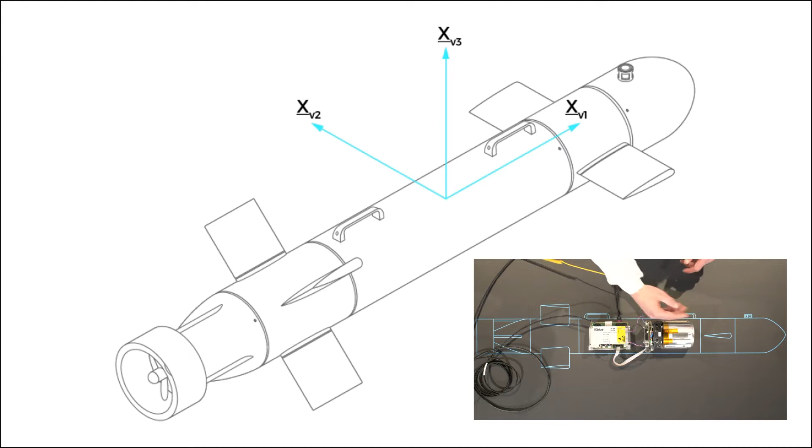So for the mechanical integration in my vehicle, I have plenty of choice of design. Here I will make it very simple and will concentrate a little bit more on the axes, conventions and orientation of the unit. This AUV here is on the side, and I will fit my INS OEM kit like this. So I will still use the same axis for X1, but you see X2 of the INS will become X3 of the vehicle.

For the electronic boards, I install them as I have room. Like I said in the previous part, I could choose to do like this or like that. Here I'll keep it simple and do like this. So now that I have properly integrated it in my vehicle, I would have to take care a little bit of heat for power dissipation. Here I have metal plates. I choose to keep them so it will dissipate through your vehicle. We'll see in the electrical part about power consumption.

So let's say this AUV body has the X1 axis along this way and the X3 axis along this way. My unit is integrated kind of on the side. X2 of the unit will become X3 of the vehicle body. Let's go back to the web interface of the unit and configure this accordingly. So in the web interface, I'll go in the mechanical parameters and I'll choose to fit the unit accordingly. So we'll see that the attaching plate side is changing direction while the board side is still on the back of the vehicle.

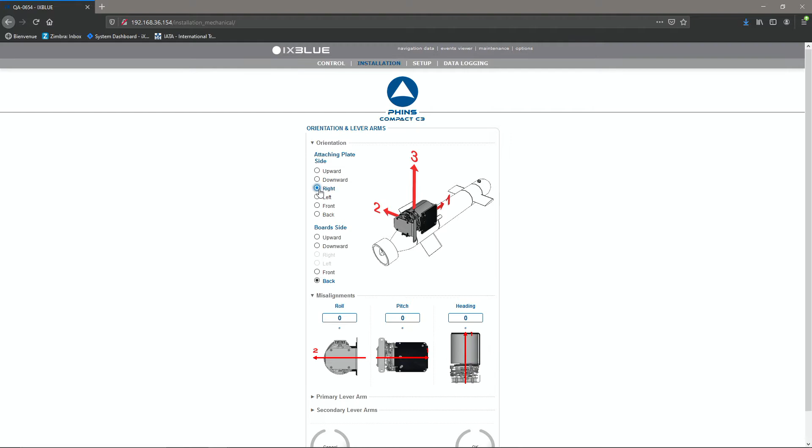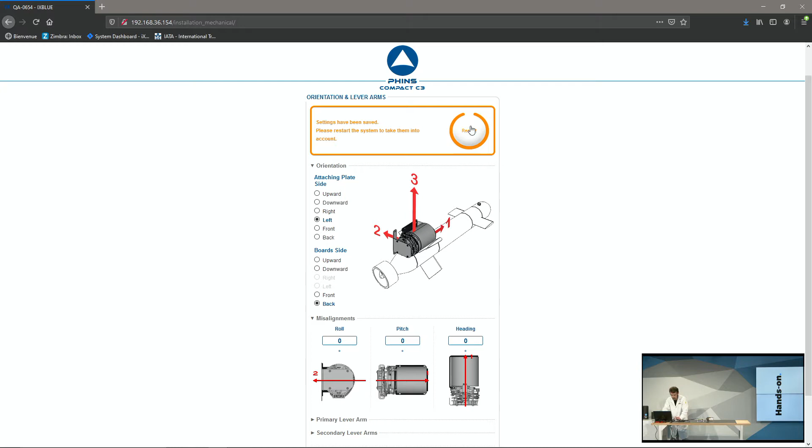Here I didn't really prepare whether it's gonna be this side or that side, so I will do it very visually. I just play with the different options to see when I have X2 of the unit becoming X3 in my user interface. So I think that's gonna be this one. You see now visually on my user interface, I have the same as I have here. The unit is on the side, on this side, and I can validate the setting in the user interface. So now the user interface prompts me to restart the unit, which I will do.

And so now, as the unit is rebooting, it was virtually like this, and now it's virtually like this in the vehicle, as I have a side view of my vehicle. So those 3 axes like this become like that with this change of configuration. It's very important for later mechanical integration because I will, for the purpose of the show, measure the offset to my USBL transponder.

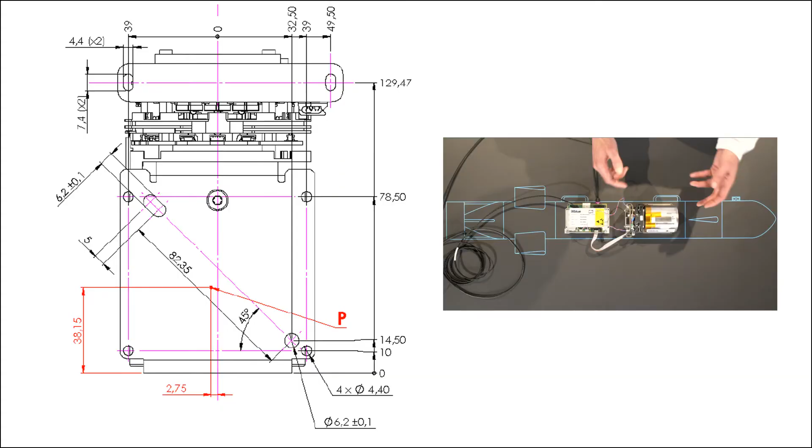To proceed with the lever arm and offsets of my USBL transponder, I will have to physically measure accurately the lever arm from here to here to here along the 3 axes of the vehicle, because now my IMU, my INS, is in the vehicle reference frame, and I will have to take a measure according to what we call at iXblue the P point, the center of measurement of the IMU subassembly. The P point is given to you through the schematic in the user documentation, and it's a little bit on the board side here and a little bit in the middle here.

So for the show purpose, I'll just use this to this and this to this for the two offsets. To measure them, I use a ruler or here a ribbon tape to measure the lever arms, to make it very visual and to implement in the user interface. So that's 23 centimeters along the X1 axis. And around the middle here, that's 6 centimeters along the X3 axis.

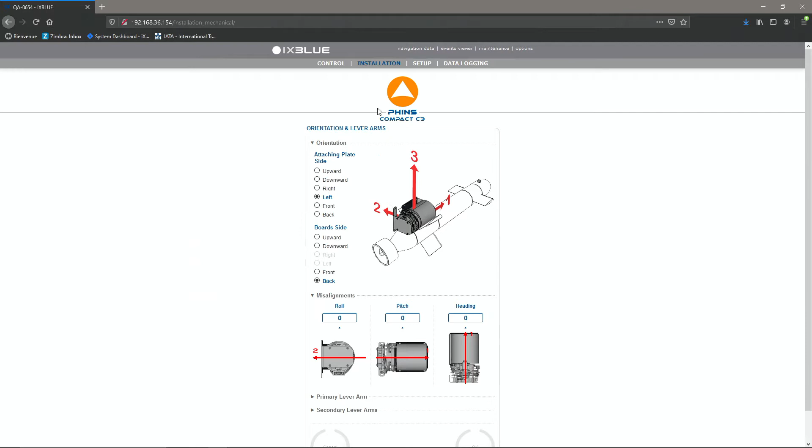So now I will set them up inside the user interface for my USBL sensor lever arm. So I go to the input menu. I choose the USBL I previously configured. And if I scroll down the configuration, I will access the lever arm. So now I can set up 23 centimeters as an offset. So you see it's 23 centimeters forward of the IMU. So it's about right, 23 centimeters forward of the IMU.

X2, let's pretend it stays at a 0 value. We choose to work in 2D to make the case study more understandable. And X3 will be 6 centimeters. And you see again, it's very visual, 6 centimeters up the INS body. So it's about here, 6 centimeters up the INS body.

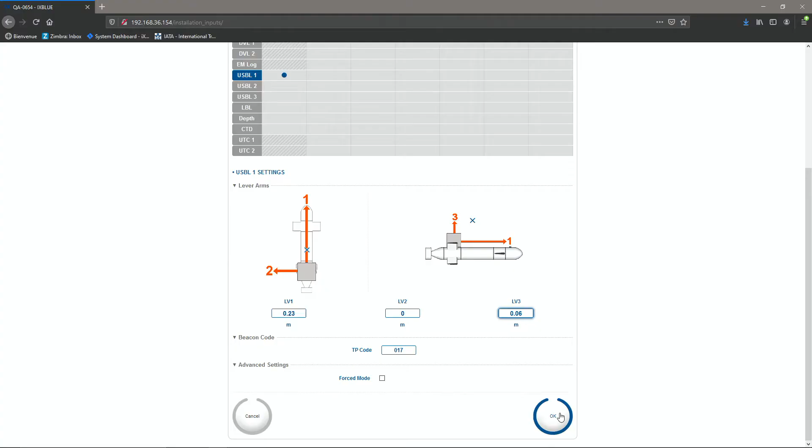So you see this interface makes it very visual, very easy for you to work in a slightly complicated situation, because by design I had to turn the IMU subassembly 90 degrees on its flank in my AUV body.

About electrical integration, it will be about a bunch of things. First, about power. So now we should not anymore use our lab power supply. We should use the power lines from the AUV body. And it's important to remind that the power supply grounds will be independent from the serial input-output grounds.

For the purpose of this demonstration, I will keep this as is, and I'll simulate a wiring of a USBL sensor over serial through this connector. For that purpose, I will need to prepare in advance specialist tooling. I'd like to show them to you today in this video, because those specialist tooling sometimes take a lot of time to order. So it's important to have them in advance, especially if you plan to have an agile vehicle integration.

And so I have this tool here to put the wire in the pins, and I have this tool here to fit the pins in the connector. So I will need those two. I will need this connector, which is provided in the scope of delivery, and I will need a little bit of wire to wire my fake USBL sensor, and a little bit of pins to wire the pins.

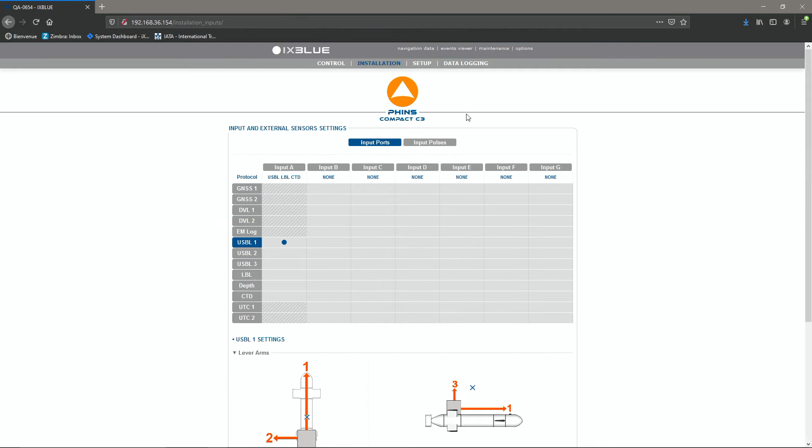Last thing before we proceed is to see a little bit of more power user features. Some features that I think I need to show you that make this product very much standalone OEM. So here it's about two other menus I'd like you to discover with me. The first one is what we call the advanced position filtering. So it gives me access to a lot of settings with the input sensors.

Like we said, we can interface to a lot of sensors with this unit, and we give you access to advanced settings of those sensors into the algorithm of the processing boards. This allows you to maintain a very tuned design with your desired application. And so, for example, here I use the USBL case. So I'd like my vehicle to take in priority USBL position over GNSS position, for example. So I can set that up. And you can see that I can also filter my USBL. Sometimes out there USBL is a little bit noisy.

Eventually I want to limit the input standard deviation of the USBL data, or I would like to reject data that have too much of an announced standard deviation. So this is exactly where I can set that up. So this page makes it very tunable for your vehicle design and integration.

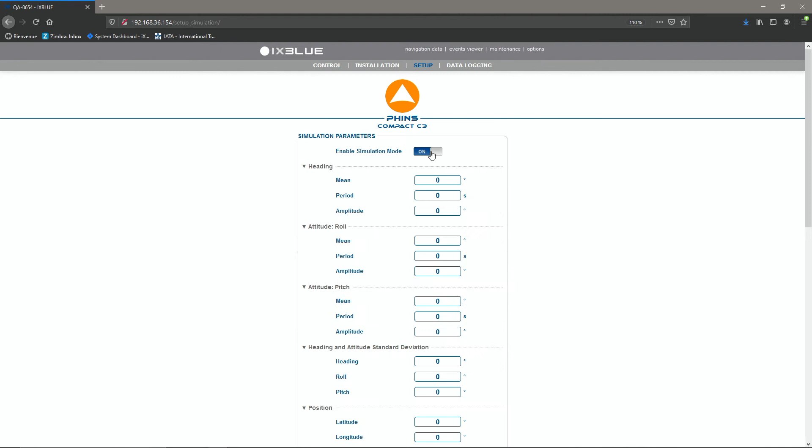The other menu I'd like to show you is the simulation mode. This simulation mode allows me to virtually output data. So you see in this menu, I can set up a heading with a period and an amplitude value. So let's do, I don't know, 30-degree heading over 30 seconds with 10 degree amplitude. And so now every 30 seconds, my heading will go from 20 to 40.

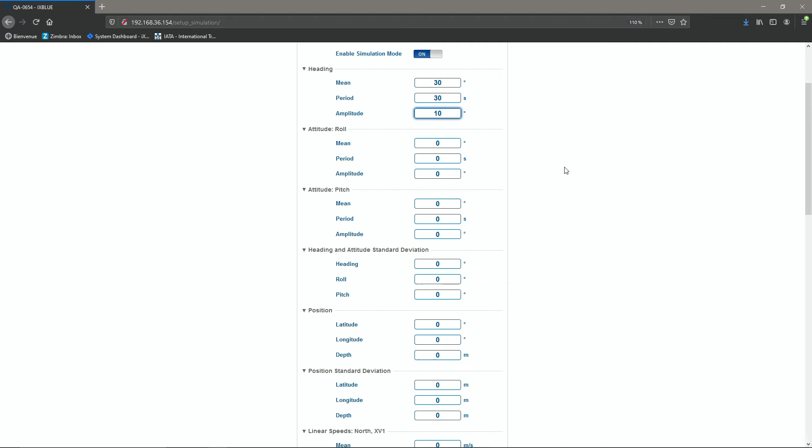And I can do that on a lot of things: position, sensors, error message, status message. Now you can visually see my heading is changing, okay? It's simulated. And by the way, the system is telling me through a status message it is in simulation mode. But basically, it allows me to test the other components of my vehicle.

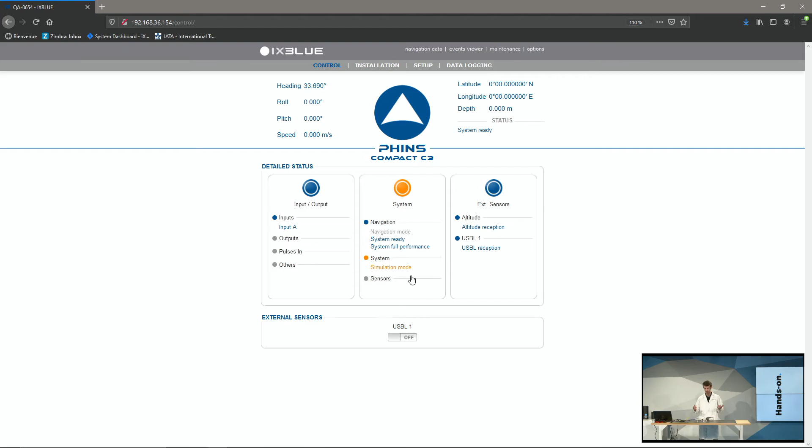For example, if I have a navigation computer that I want to test on output data of the INS, or if I have extra other sensors that will read data from the INS feed, I can very much test and simulate fake data in simulation for test purpose and integration purpose. It allows me to have the best design, the best integration possible of my vehicle.

Now it's time for me to call Cor, and Cor will give you some very interesting user perspectives about his experience integrating exactly the same unit in his product, the Nemo. Cor, over to you. Oh, thank you, Henry. Yes, I'm going to talk about the user's perspective of integrating the iXblue Phins C3 in the Nemo that you can see next to me here. I work at RTS, which is a company that was founded in 2002, and we are based in Norway, and we work with subsea electronics and developing subsea products.

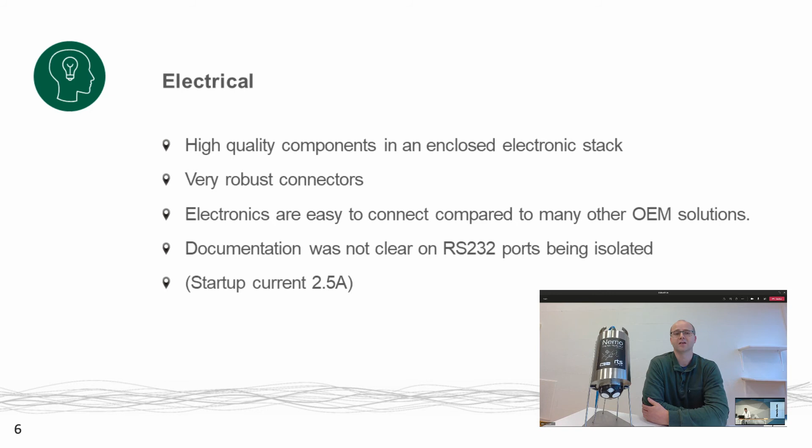Looking quickly on the electrical level, we found that Phins C3 had high quality components in an enclosed electronic stack. The connectors were very robust, and that's a very good thing. And it was also easy to connect to it compared to many other OEM solutions. But we saw there were some issues with the documentation, that the RS232 ports were not isolated.

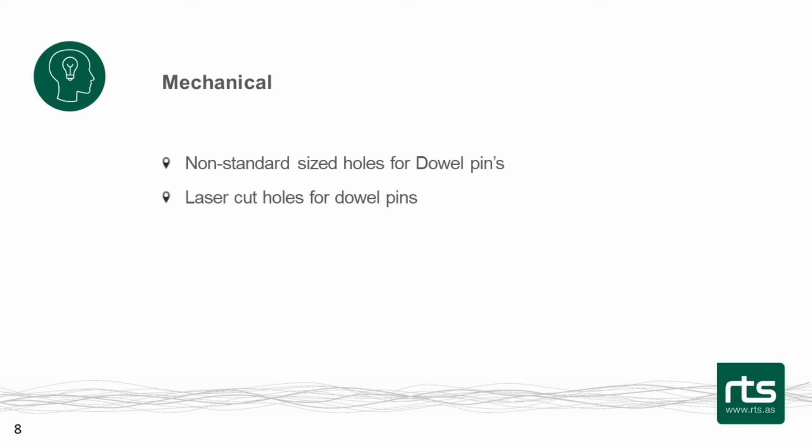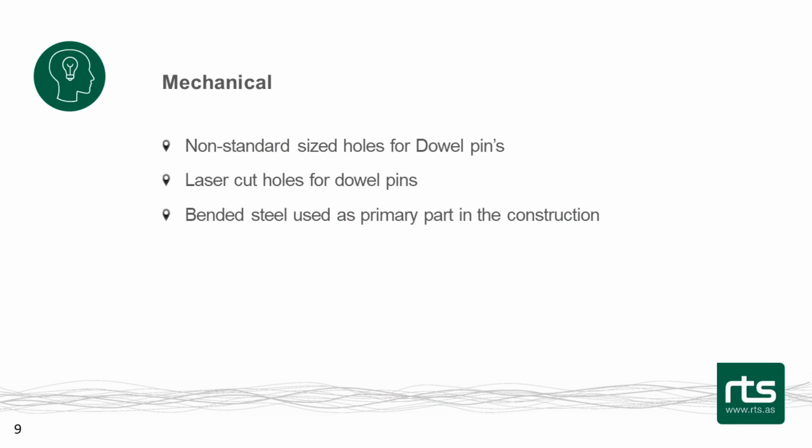Going over to mechanical, there were some issues there: there was not a standard hole for the dowel pins, the pins you use to orientate the unit very accurately. Also the holes for the dowel pins were laser cut, and that means there's a tiny bit of metal inside the holes, so we had to remove that to accurately fit the unit. Another thing was that bent steel was used in the construction, and it's difficult to get bent steel accurate.

In terms of performance, it was beyond our expectations. It was much better. But we also see that the specification of the unit is made for a wide range of aiding sensors from different manufacturers, and that means that these aiding sensors are of very different quality and accuracy. That will limit the specification.

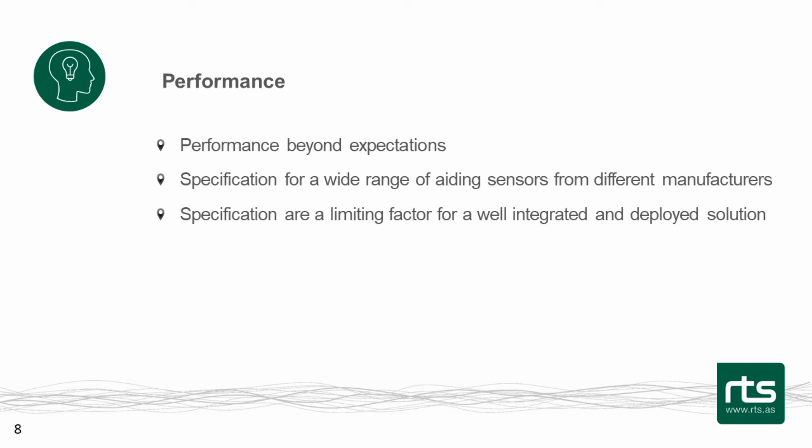And the specifications are a deciding factor where you can deploy the unit. If you have a very highly accurate sensor, calibrated for the area you're going to work in, and you have a very good deployment, you are going to have much better results. But you can't use it; the specification doesn't agree. Yes. Okay.

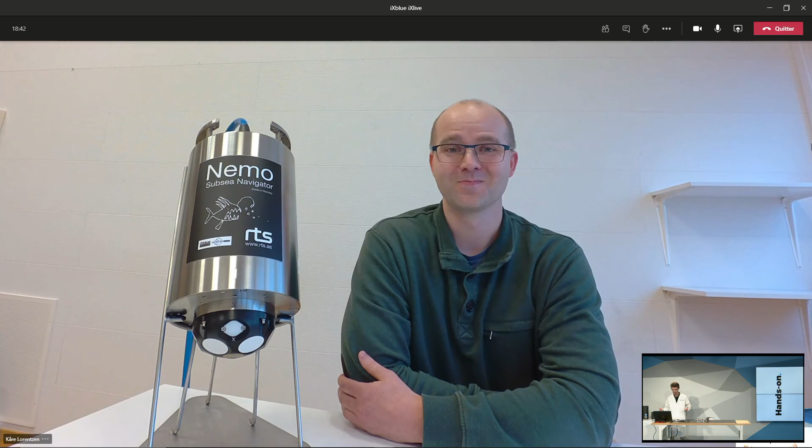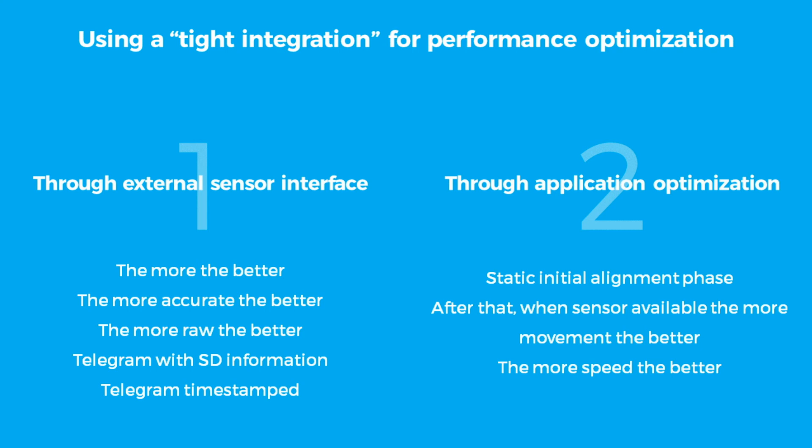Yeah, thanks. It's indeed something we spoke a lot about over our customer support exchange as you were integrating the product. But I'm very happy you give us this user perspective. It's a little bit what I said as well through this series of videos about performances. I'm happy you report to us those outstanding performances. It's also the result of your outstanding integration. Thank you, Kåre.

So to finish this video, 4 things I'd like you to remember. This was a very easy and modular integration. We've seen we could integrate or interface many different ways. It was fast and easy to configure. Of course, it's a mock-up scenario, but the idea was to give you the feeling that in under an hour, we can already play and configure this kit.

Like we said, we like to think it's a standalone integration, meaning everything's inside the unit for you to integrate in your vehicle. And also, it's mass production ready. Should you have a fleet of vehicles you'd like to install with those products, we've made things we think easy for you.